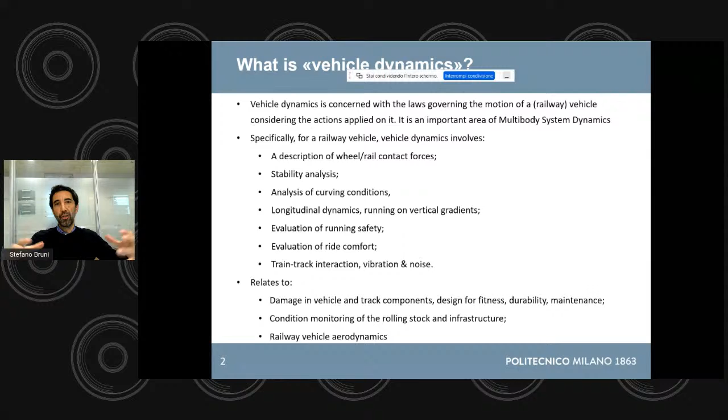This is an overview of my presentation. I will try to address 4 main points. There is an initial part which is a little bit more theoretical and clarifies the fundamentals of wheel rail contact, as it is useful to introduce vehicle dynamics problems. Then we will go into stability and curving behavior for a railway vehicle, which are 2 fundamental problems in the design of a railway vehicle. We will then talk shortly about ride quality, and finally condition monitoring.

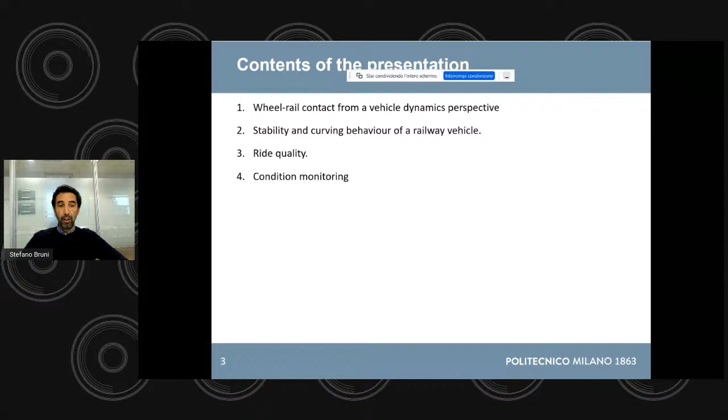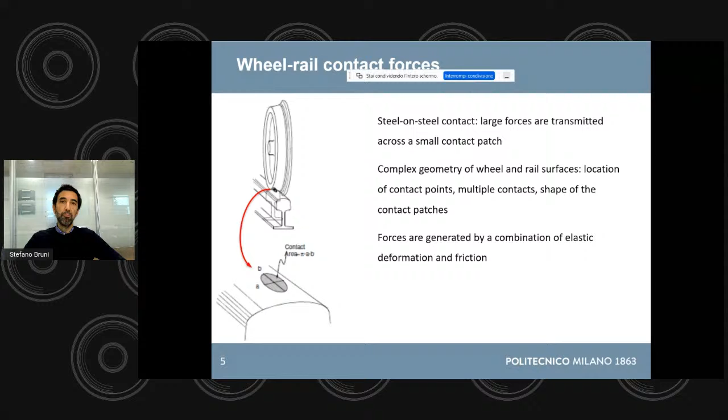So let me start with a summary of wheel rail contact forces. In railway vehicles, we have steel-on-steel contact of the wheel over the rail, with large forces being transmitted over a very small contact patch. On top of that, we have a complex geometry of the wheel and rail surfaces, a nonlinear relationship of the forces to the running condition of the vehicle, and forces being generated by a combination of local elastic deformation close to the contact region in the 2 contacting bodies, and the effect of friction.

So it is a very complex problem, and it requires rather complex solutions. I will not go through all of the solutions and methods and models, because it would be too time-consuming. I will just clarify some fundamental issues. Let's say the problem of defining wheel rail contact forces can be split into 3 steps. The first goes under the name of geometric problem or contact point search. It consists of finding the position of the contact points between the rails and the wheels, given the relative position of the 2 bodies.

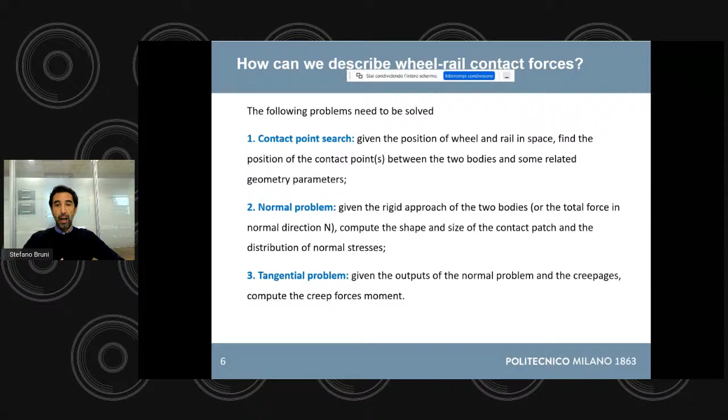And finally, the tangential problem consists in computing the tangential forces, components of the contact force. That means the frictional forces developed between the wheel and the rail, once the normal load is known, and based on the relative motion of the wheel and the rail.

In terms of contact point search, this can be addressed in different ways. I'm not so much interested in describing the details of how this can be solved, but let me just say that in the end, what you get is summarized by the plots you see in this slide.

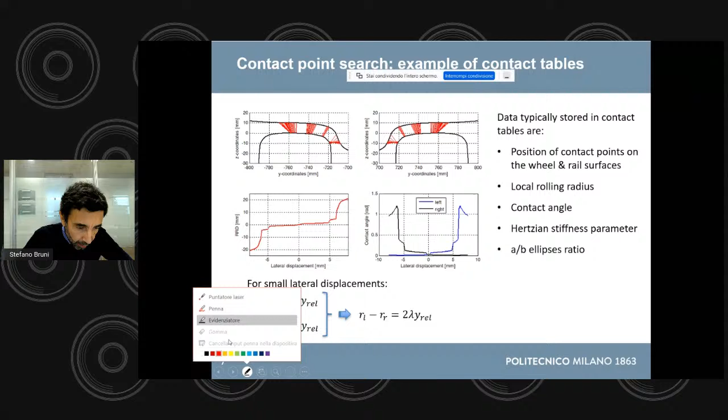So in the upper part here, if you can see my mouse, maybe I can use a pointer to improve visibility. I see it - maybe it was not such a good idea. Or I can put it to red and use this choice, okay?

In this upper part of the plot, you see the transversal profiles of the two wheels and of the rails, and you see the red lines connecting points on the two surfaces, which show where the two profiles will become in contact depending on the relative position of the wheels over the rails.

When the left wheel is completely displaced to the left, the gauge corner of the rail makes contact with the wheel flange in this region, and on the other wheel-rail couple, you have contact on the top of the rail with the tread of the wheel. When you move the wheel from left to right, contact points will move into an opposite position where the flange of the right wheel makes contact with the inner corner of the right rail.

Out of this analysis, you can also find important geometrical parameters, like the so-called rolling radius difference - that's the difference between the local rolling radius for the left and right wheel, caused by the conicity and by the peculiar shape of the wheel profile.

You can also find the value for the contact angles, the angle defining the slope of the tangent to the contact, of the common tangent to the profiles in the contact point.

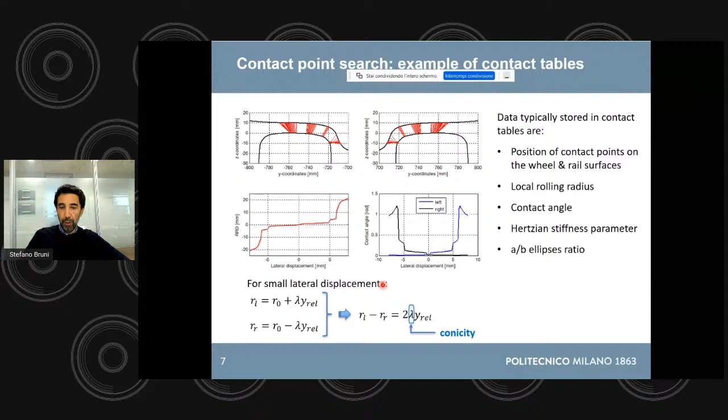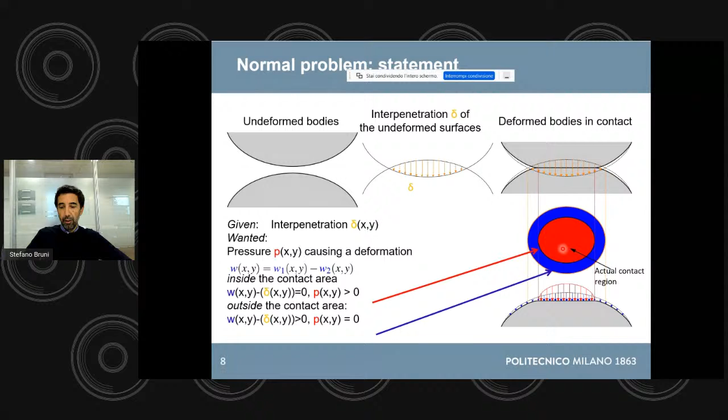Now, there are different ways, again, to solve this problem, the simplest one being the very well-known and popular Hertz theory. In that case, we take one simplifying assumption: we consider a constant curvature for the two contacting bodies, for the wheel and for the rail, in the region where contact takes place.

Out of this and some other simplifying assumptions, like assuming that the wheel and the rail behave elastically like elastic half spaces, we get the classic solution by Hertz, which states that the contact region is an ellipse, defined by the semi-axis A along the rolling direction and B in the direction perpendicular to the rolling direction for the wheel, with an ellipsoidal pressure distribution where the maximum pressure is defined by this expression, which is a function of the normal load N and of the sides of the ellipse, basically the product of the two semi-axes.

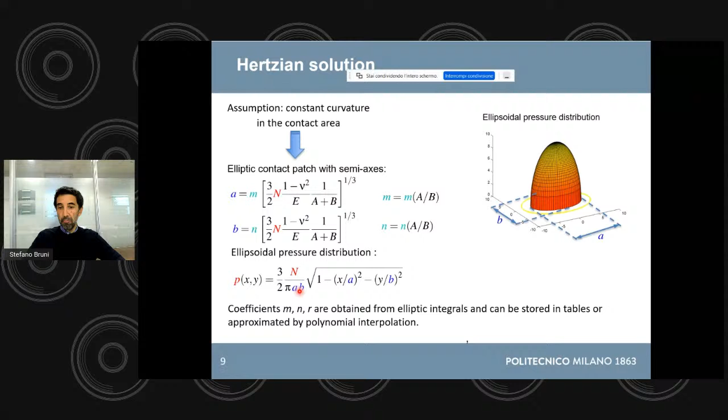Of course, in this case, the models you have to put in place are more complex. They are also more computationally intensive, which means if you are using these models in numerical simulation in the time domain, the simulation is going to be more time consuming because of the time required to solve the complex equations for wheel-rail contact. But it provides a more accurate description of wheel-rail contact, which is important both to define effects like curving and stability, which depend on the size and shape of the contact patch, but also have an effect on possible damage caused by rolling contact fatigue and wear, because this is highly affected by parameters like the maximum pressure in the contact region.

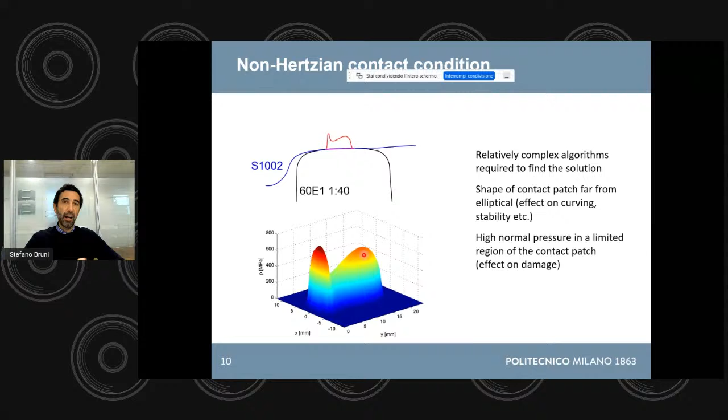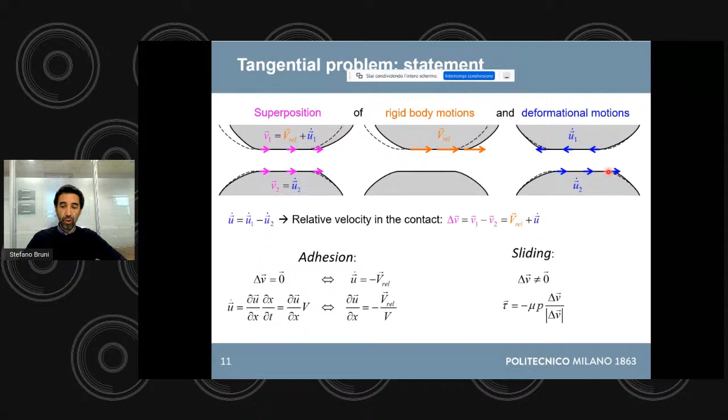Then we define a longitudinal creepage parameter. This is a non-dimensional parameter defined as the ratio of the difference in the rigid velocity of the upper and lower body divided by a reference speed, which in this case is the average of the forward speed for the wheel center and the peripheral velocity of the wheel while rolling with angular speed omega. And we define the longitudinal frictional force Fx divided by the adhesion limit mu times N, where mu is the dry friction coefficient between the two bodies, to be a nonlinear function of creepage.

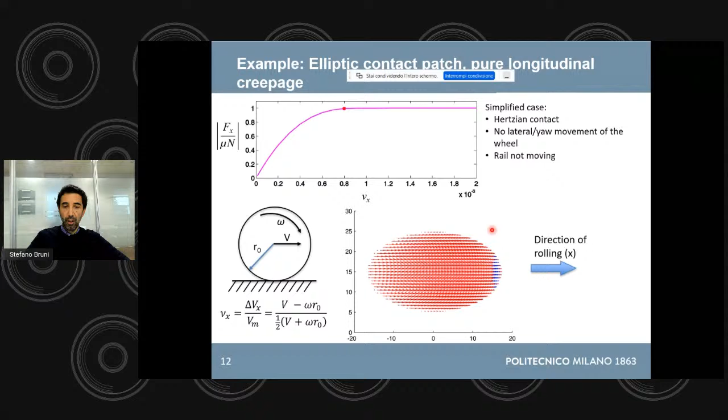You see that the contact patch gets divided into a region in blue color, where we have adhesion between the wheel and the rail, so no slip between the two bodies, and another part of the contact where we actually have slip between the two bodies. When we further increase creepage, the point here moves up, meaning that while increasing creepage, we also increase the total force, and also increase the size of the portion of the contact patch where we get slip between the wheel and the rail. This continues increasing until we reach a saturation condition where the longitudinal force cannot grow anymore because it has reached saturation. In this condition, the contact patch is fully in slip condition, like this.

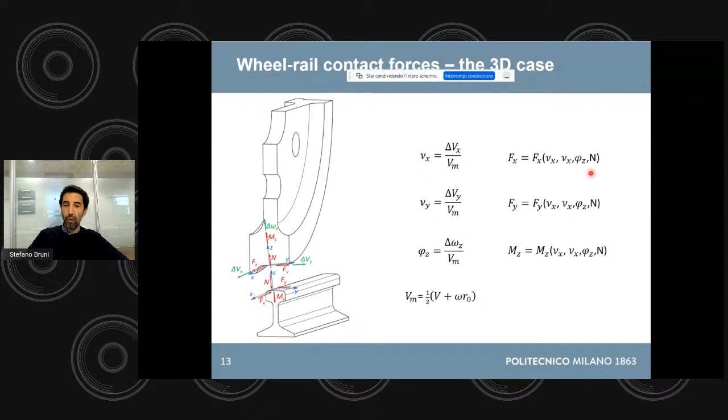And we can define three components of contact force and moments: a longitudinal force component Fx, a lateral component Fy, and a spin moment Mz, which are exchanged between the wheel and the rail, and they become a function of the three creepage components and of the normal force.

This is again very complex to describe, and we need to simplify it in some way. A very popular way of simplifying this is to take the assumption of small creepages, which means we confine our attention to a range of contact conditions where the various components of creepage are all small. Then we can take a linear approximation for the relationship between the creep forces and the creepages.

This results in the well-known Kalker's linear theory, which states a proportionality between the longitudinal creep force Fx and the longitudinal creepage νx through coefficient F11, and a linear relationship between the lateral creep force Fy, the lateral creepage νy, and the spin creepage phi z, through two coefficients F22 and F23.

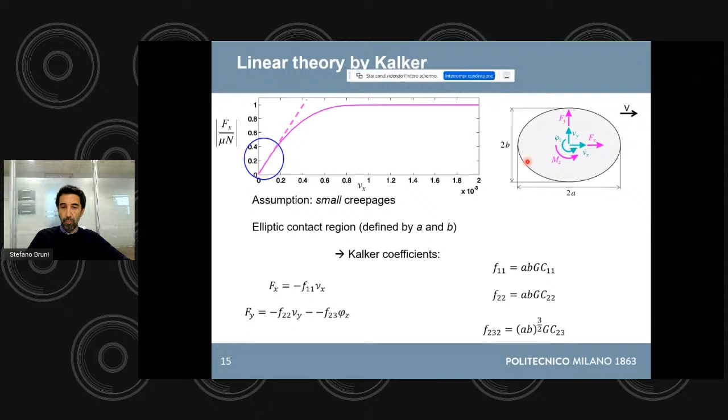This is only valid for an elliptic Hertzian contact patch, but it's very useful because it's a simple representation of the forces. Now let us look at how this translates into an analysis for stability and curving.

First of all, stability. What do I mean by stability? Well, the picture on the right is a photo taken in France, I think in the middle of the 1950s, when a world record was performed on a French track, and the world record was fully successful.

But when people went back onto the track after the record train had passed, they could see that the track was completely misaligned. It was realized that this was caused by a violent movement of the wheelset in the lateral direction, which was later recognized to be accompanied by a rotation. This is a top view of the wheelset - a rotation around the vertical axis, known as the yaw rotation. So a combined lateral and yaw motion of the wheelsets in the train, caused by a particular instability condition, which was then known as hunting.

It took a long time before this phenomenon could be fully clarified, until, I would say, the end of the 1960s. After that time, we took very seriously the need to perform a very accurate stability analysis as part of the design, operation and maintenance of railway vehicles, especially for high speed.

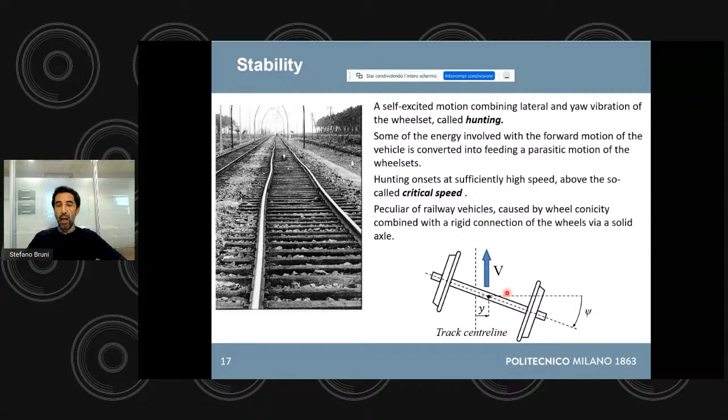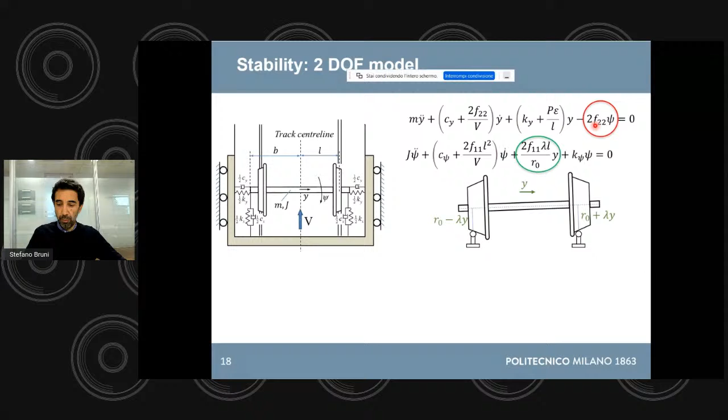If we didn't have these two coupling terms, the motion in lateral and yaw direction would be completely uncoupled. But due to these terms, the motion becomes a complex combination of lateral displacement and yaw rotation.

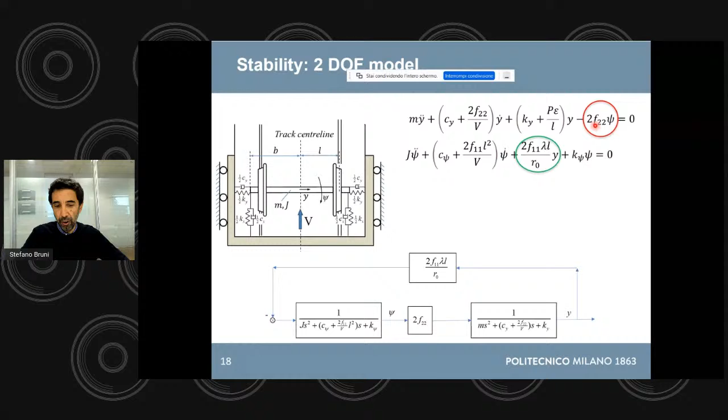If you are familiar with automation and control theory, you may like describing this in terms of a block diagram, where this block describes the lateral dynamics and the yaw rotation of the wheel set. We get the yaw angle psi in output. This is multiplied by coefficient 2F22, and provides the forcing effect to the lateral vibration of the wheel set, which provides as output the lateral movement of the wheel set, fed back through a proportionality gain coefficient, which becomes the forcing effect for the yaw rotation of the wheel set.

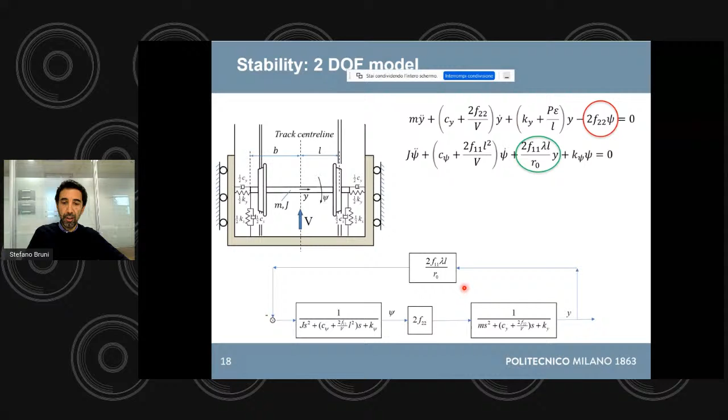This scheme shows that the phenomenon is basically a natural feedback loop developed for the wheel set. If you have familiarity with automation and control engineering, you know that when you have a feedback loop with too high gains, and especially a non-favorable phase, the feedback loop may become unstable. This is actually what is happening in our case.

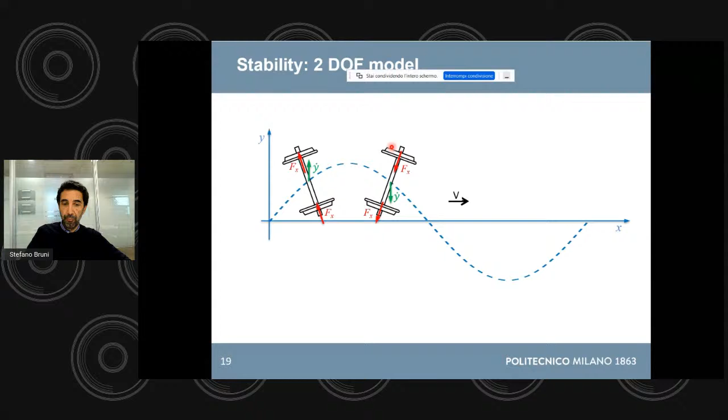Looking at it a different way: when the wheel set oscillates harmonically, as it moves to the left (up in this top view), this combines with a yaw rotation that produces lateral forces also pulling the wheel set to the left, so the instantaneous power of the contact forces multiplied by the velocity is positive. When the wheel set goes back to the center and moves to the right, the yaw rotation changes and becomes opposite, so again you have the same direction for the lateral creep forces caused by the yaw rotation and the movement of the wheelset.

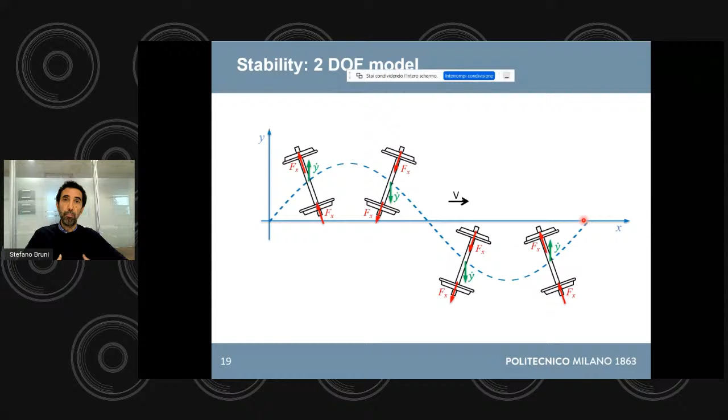This continues through the entire cycle so that you have continuously positive power feeding energy into the vibration of the wheelset. So instead of becoming a damped oscillation, it becomes an expansive oscillation, confined only when the flanges of the two wheels get in touch with the inner gauge of the rails. Because this contact can be very strong, hard, and violent, you may even get a derailment of the wheelset, or a permanent lateral displacement of the track, of the rails.

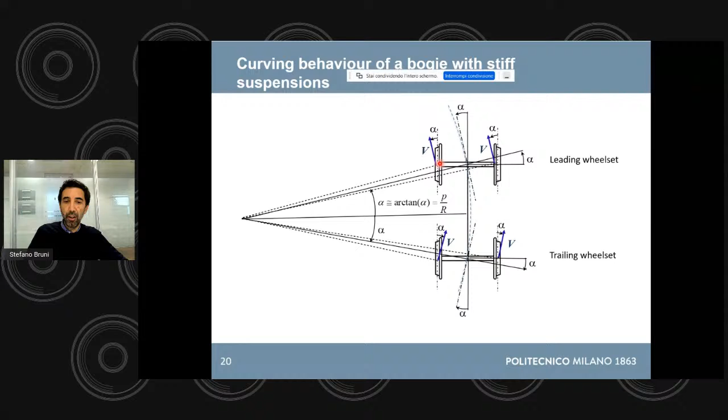So if we consider a very simple situation where we have the bogie with infinitely stiff suspensions, and also assume relatively small creepages, we may use the theory by Kalker we have seen before. We assume there is no flange contact between the wheels and the rails, which is a highly simplifying assumption, but otherwise we would get into a too complex case that could only be solved by numerical means.

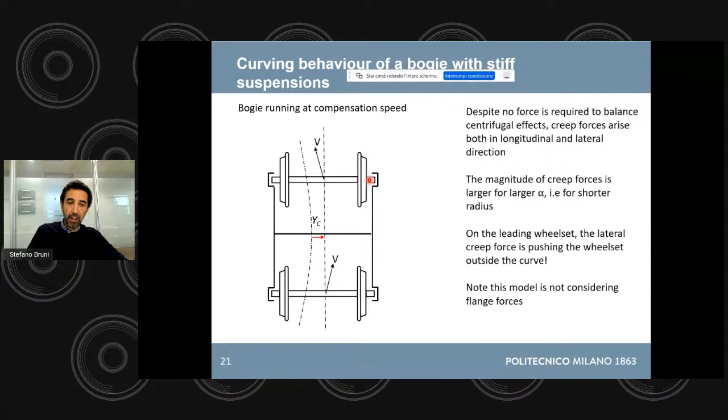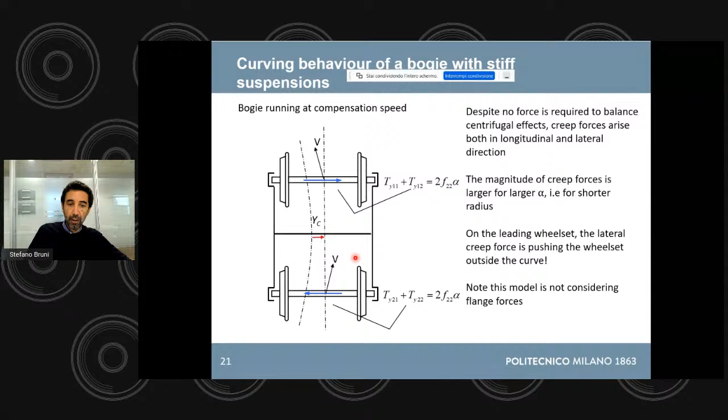If we stick to these simplifying assumptions, then we find that even if we consider the bogie running at compensation speed, meaning centrifugal effects due to the curvature of the track are fully compensated by the cant applied in the track, we still have transversal creep forces arising on the leading axle and on the trailing axle. Because these opposite forces generate a moment which tries to yaw the bogie in a clockwise direction, this must be reacted by longitudinal creep forces arising at the four wheels.

I would like to stress that all of these forces, represented by the blue arrows in this plot, are not needed for the bogie to achieve a balance of centrifugal forces, because that is already guaranteed by the cant of the curve, by the compensation. So these are unnecessary forces that still arise because of the specific way the bogie runs through the curve.

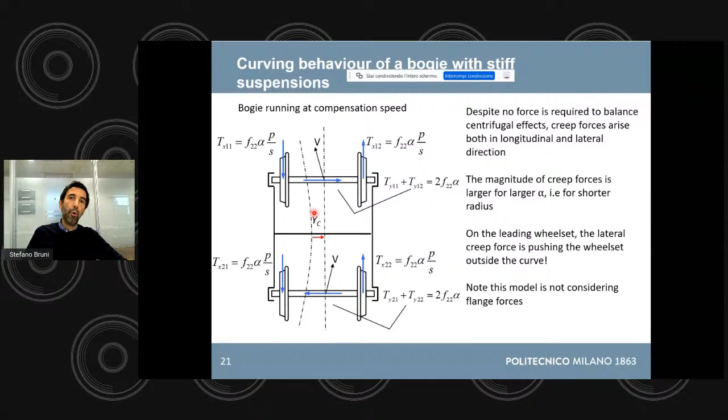Even when we make the picture more complex by introducing a saturation of wheel-rail contact forces, by introducing flange contact between some wheels and the corresponding rails, it still remains that there is an excess of frictional force being generated while the vehicle negotiates a curve, beyond the minimum value of frictional or creep forces that would be needed for that. Of course, all of these frictional forces cause damage and wear, both in the rails and in the wheels, which is highly unwanted.

So the question ultimately is how to design the vehicle to have good curving performance, which means especially avoiding excessive wear and damage on the rolling surfaces as a consequence of curving, ensuring the forces are not large enough to be harmful to the safe running of the vehicle, and at the same time guaranteeing good stability for the vehicle.

Unfortunately, these two goals turn out to be in conflict with each other. If you want a design for good curving, you want flexible suspensions that, contrary to what I was showing in the previous two slides, will allow the wheelset to align radially, compensating for the effect I showed before, reducing wear and damage in the wheelset, reducing creep forces, and improving safety. But soft suspensions can be shown to be harmful to stability.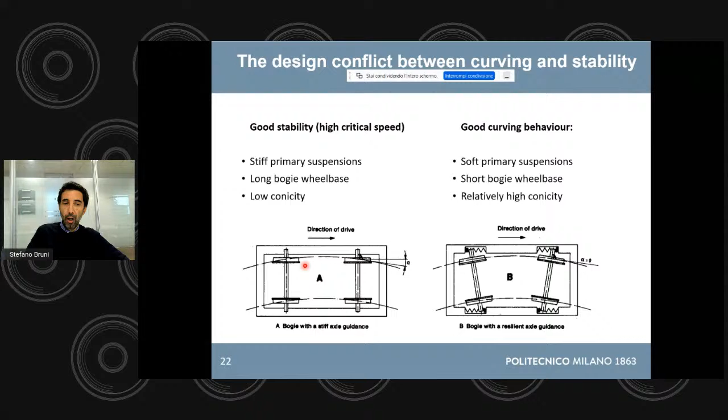To get good curving behavior, we'll also want a relatively high conicity so that the conicity of the wheels can compensate for the different length of the outer rail compared to the inner rail. But this again is harmful to stability, and so on. So how can we solve this design conflict?

Apart from passive optimization of the vehicle, which is the classical way followed since the start of modern railway vehicle design until a few years ago, it is now more and more frequent to use active suspensions. So the first example I would like to show is an active primary suspension, with a published example from Bombardier, which uses longitudinal actuators.

You see the red arm here, which is moving back and forth the axle box based on an actuator, which is basically formed by this green lever. This is capable of creating a desired yaw angle for the wheel set, or applying a yaw torque on the wheel set, which will control the movement of the wheel set, inhibiting instability.

If we go back to the feedback control loop that we considered before, shown here by the part of the picture with a blue shade, we can add another feedback loop created by active control, which can be designed to cancel the effect of this instabilizing effect. Of course, having an actuation system at the primary suspension level can be challenging in terms of making sure that this can be designed to be safe enough, reliable enough, and so on.

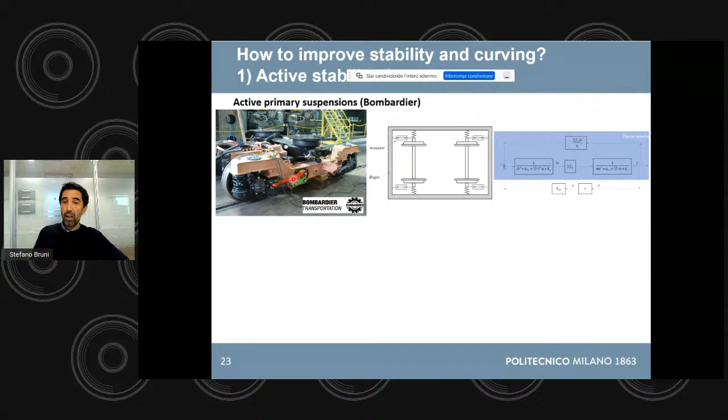In other cases, you may want to apply active control between the car body and the bogie, at a secondary level. This is an example of an electromechanical actuator used to apply controlled torque to the bogie between the car body and the bogie. This goes back to research we were performing with Alstom some years ago.

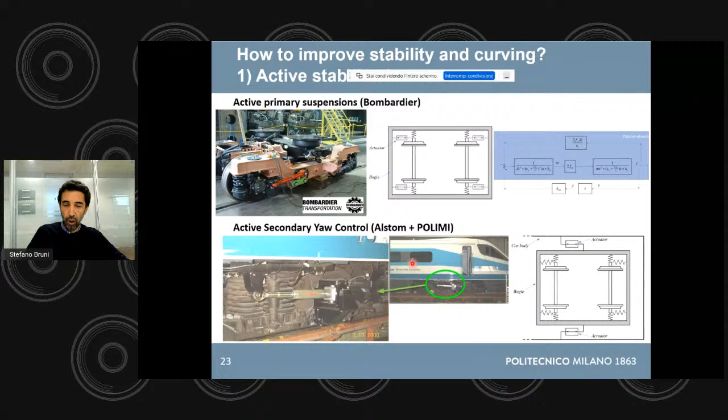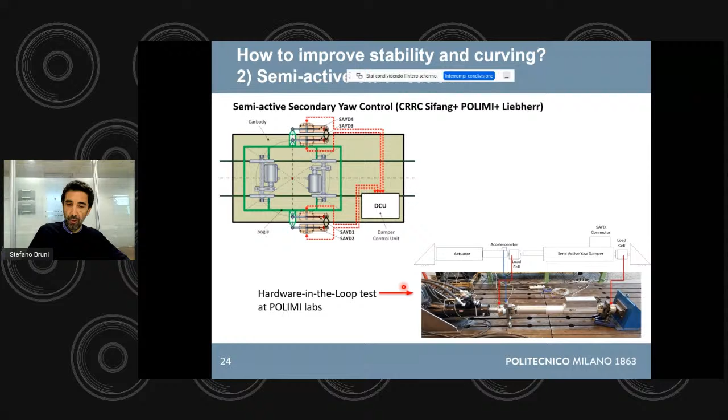More recently, people have started to think about semi-active solutions, and I'd like to show you a concept for a semi-active yaw damper we have been developing quite recently with CRRC, the Chinese railway vehicle manufacturer. So far this concept has been tested in our labs according to a hardware-in-the-loop test, but I don't have time to go into details of this. If you have questions, I would be happy to answer them.

And finally, you can use active steering, which is normally more frequently used for low speed vehicles which have to travel very narrow curves, so for urban environments like trams and metro vehicles.

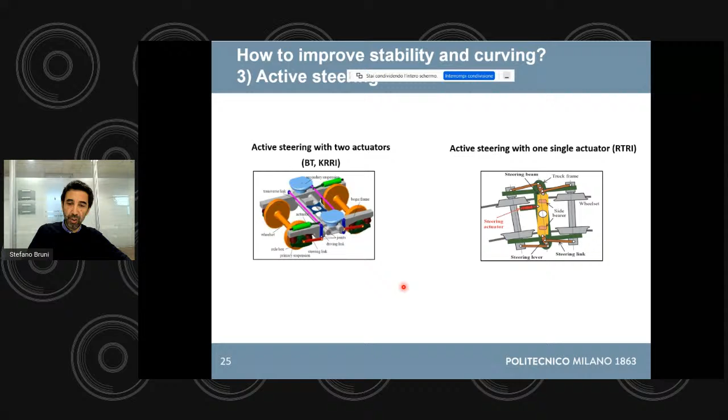Let me now go into ride comfort, ride quality, which has to do with passenger comfort. The rationale behind this analysis is that when the passenger is sitting in the car body of a vehicle, they are subjected to vibrations, and these vibrations will cause a discomfort sensation, which is related not just to the intensity of the vibration, but also to the frequency at which it happens.

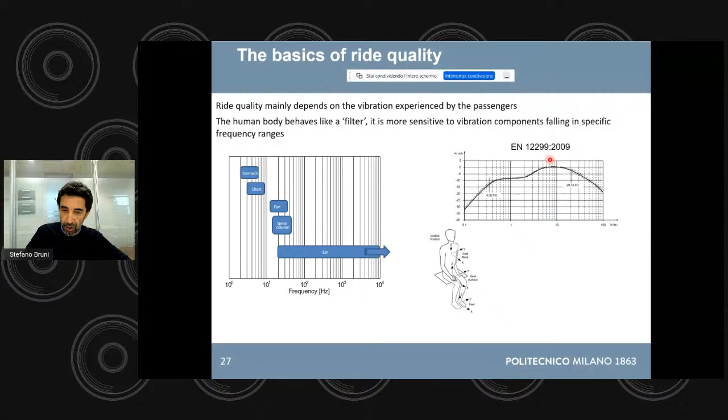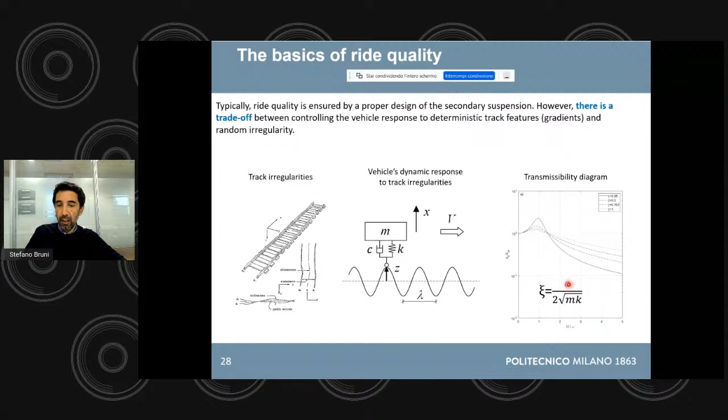But unfortunately, then you get higher vibration when you get into the resonance condition, and when you get into slow, low frequency effects, like the effect of gradients in the track. So you cannot reduce damping too much, and again you are faced with a conflict between using too low a damping or too high a damping.

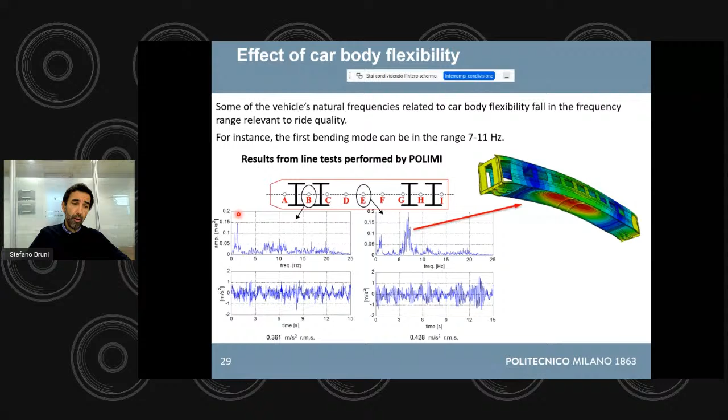So how to control at the same time rigid body motion and flexibility effects? You have 3 options. The classical option is to use passive suspension.

In this simple scheme, you have the primary suspension here. A label is missing, I apologize for this. Secondary suspension between the bogie and the car body.

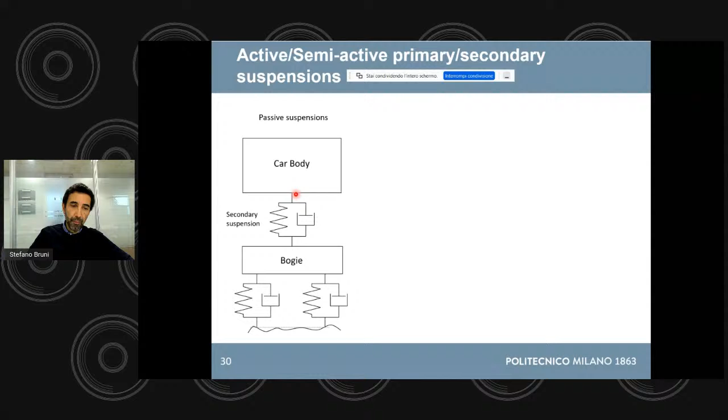You may opt for active or semi-active suspensions at the secondary suspension level, replacing the passive damper by an actuator or a semi-active damper here, or you can use active or semi-active primary suspensions.

So you're replacing primary passive dampers by either full active actuators or adjustable dampers.

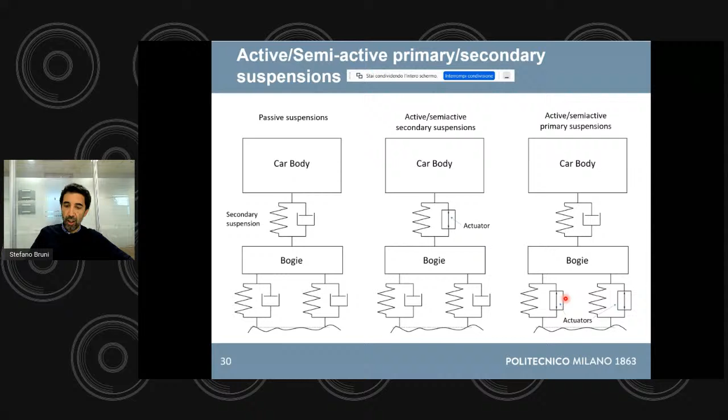This is an example. I don't have time to go into the fine details of the different approaches, but I will be happy to answer questions on this. I want to show you an example from a project we are following in cooperation with CRRC, where we have tested both semi-active primary and semi-active secondary suspensions.

In the case of semi-active primary, you have a very limited benefit in the frequency range between 1 and 3 Hertz, which is related to the rigid motion, but you still have a good effect in the frequency range around 8 Hertz, which is related to the first bending mode of the car body.

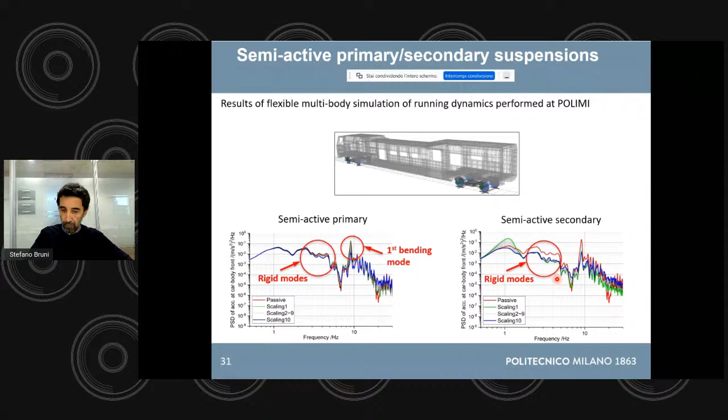If you resort to semi-active secondary, then you can have a good improvement here. I missed mentioning that the red line is for the passive vehicle, and the blue and green lines are for different scalings of the semi-active suspension. So you can improve both the response of the car body in the frequency range related to rigid body modes and to the first bending mode.

I'm afraid I will need to skip my slides about active pneumatic control.

So I have maybe 5 minutes to talk about condition monitoring. While condition monitoring maybe is not directly related to, or is not really one part of vehicle dynamics, it has a very strict connection. And I can say there is a very strong motivation for considering condition monitoring of railway vehicles nowadays.

If you talk to an operator in Europe, and even to an infrastructure manager in Europe, they will always tell you, we want to reduce maintenance costs. And the way we would like to do that is to improve our condition monitoring so that we can better know the condition of the rolling stock in the case of the operator, and of the track in the case of the infrastructure manager, and then optimize our maintenance strategies based on this knowledge.

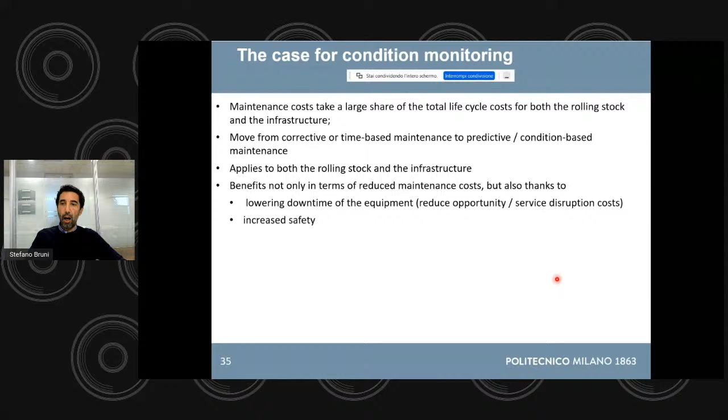Of course it's a very ambitious and very complex task, but something can be done and rapid progress is being made. I would like to show you just some examples.

One example we are following in cooperation with Lucchini. Lucchini is a very important company in Italy manufacturing wheel sets, especially but not limited to high-speed vehicles. For instance, to my knowledge, they are supplying all of the wheel sets for Chinese high speed, which is the largest market for high speed in the world.

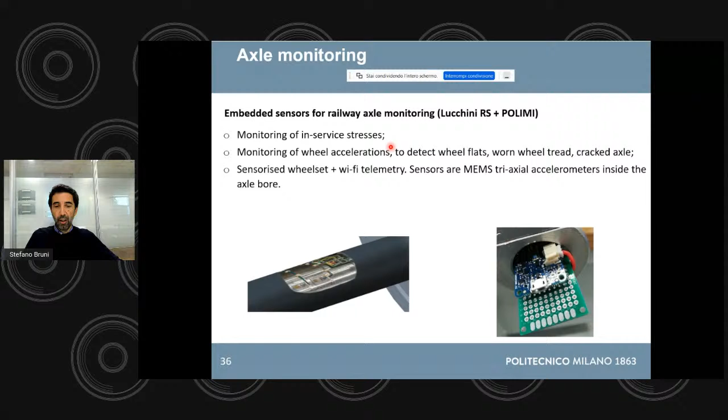They are now considering, and we are supporting them in this, having instrumented wheel sets which allow monitoring of in-service stresses together with monitoring of in-service vibration. This can be used for different purposes: to know about the condition of wheels, to recognize the effect of wheel flats, to know about stresses and then improve the design, and also adapt the periodicity of non-destructive testing of axles to find the presence of fatigue cracks in axles.

We are also considering the chance to use these instrumented wheel sets to provide a continuous in-service health monitoring of railway axles.

In Italy, we were really shocked some years ago, in 2009, by the tragic accident in Viareggio. So we are spending an effort to make sure that this will never happen again.

One way is to have continuous in-service health monitoring of railway axles. If a crack is propagating in the axle, you can recognize its presence from the so-called breathing mechanism, which means while the axle is rotating, the crack will open and close due to the opposite effect of bending forces acting on the axle. This turns into distinctive features of the bending vibration of the axle that can be measured and recognized.

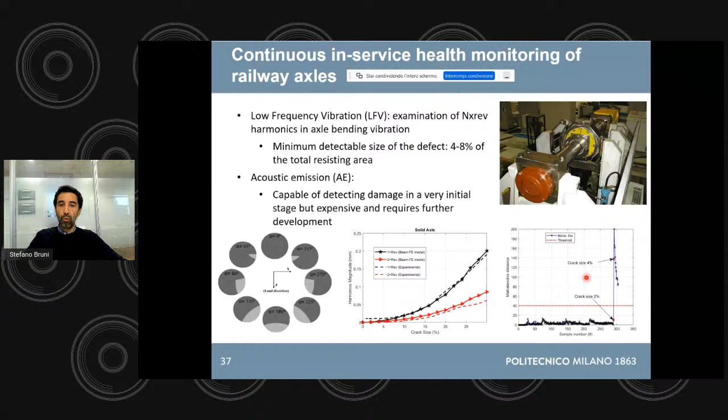According to our laboratory tests, for the time being we were able to detect a crack size which was 4% of the total resisting area in the axle, which is still in the starting phase. So you can rule out this axle before it gets into a dangerous situation where it could fail and cause an accident like the one I mentioned.

Another important topic involves another type of instrumented wheelset, used to measure wheel-rail contact forces, which can serve several purposes including the homologation of new vehicles. This is a very expensive measuring setup, so it's not for equipping a very large number of wheelsets in service, but it's still used for experimental vehicles.

This is the system we developed for the ETR 1000 high-speed train, the new generation high-speed train in Italy. It was tested on the Italian high-speed line up to speeds slightly above 390 kilometers per hour. Here you see one example of the measurements with a very stable and well-performing signal from our system.

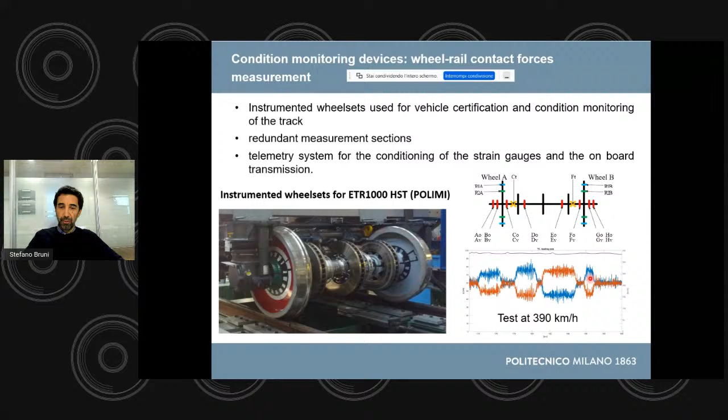Another important topic, as I'm approaching the end of my presentation, is monitoring and prognostics of bearings and gearboxes in the traction unit of a railway vehicle, a locomotive, or a distributed power train set. In this area, we did a lot of research.

I would like to give you an example with a test rig we established together with Bombardier, which includes a traction motor, a gearbox, bearings, and a brake motor used to feed back, operate, and brake the drive unit, feeding power back into the traction motor.

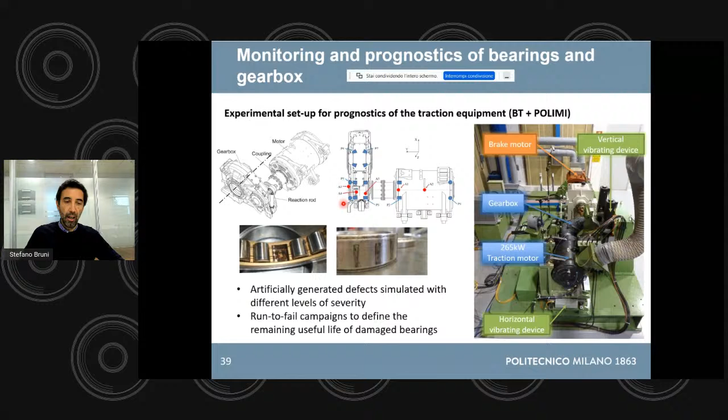We applied initial defects which were generated artificially, and we could see how these defects were growing with time, and also which were the best acceleration and temperature signals suited to spot these defects in their early stage, avoiding catastrophic failures in the drive unit.

I will conclude with this example. This is totally different—it's a portable condition monitoring unit. This is a one-euro coin to give you an idea of the size of this unit. I'm aware that euros are not in use in Brazil, but this coin has a diameter of 23 millimeters.

The unit is nice because it includes an energy harvester system. I apologize for some words in Italian here, but I hope you can still get the point. You have a small battery, a unit for managing power, a microcontroller, a 3-axis accelerometer, a temperature sensor, and also a low consumption MiWi unit able to transfer the measured data to a receiving unit on board the vehicle.

So this is very nice for a sort of revamping of existing units, providing them with condition monitoring capability.

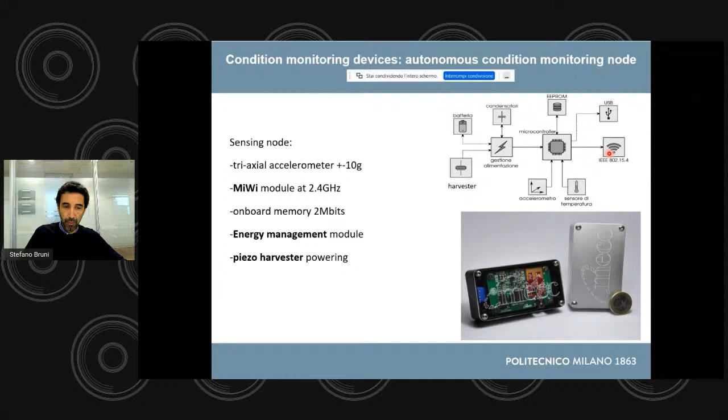I think this is my last slide, so I thank you for listening. I hope I was keeping the time more or less to 15 minutes, and of course I will be very pleased to answer your questions.

All right, thank you, Professor Bruni. It was a very good presentation.

Almost a complete railway dynamics course, followed by some of the recent developments. And we have some questions here.

Just let me refresh the form here so I can check if anybody has asked something more. Okay, so here we go. I will try to organize the questions more or less in chronological order. So let's move on—first one comes from Pedro.

Pedro is a student at UNICAMP, and he's asking: how can you use automation, and specifically computer vision, to help improve safety and performance in vehicle dynamics? Okay, thank you, Pedro. This is a very interesting question.

The first point that comes to mind is vision can be used to improve monitoring of infrastructure. Already today, track geometry monitoring, which is important not only for ride quality but also for safe running of vehicles, is done by optical systems often combined with accelerometric systems. This exists already, but it may be improved. In bad weather conditions, like snow, cameras may not work at the top of their performance, and then you may have issues with this.

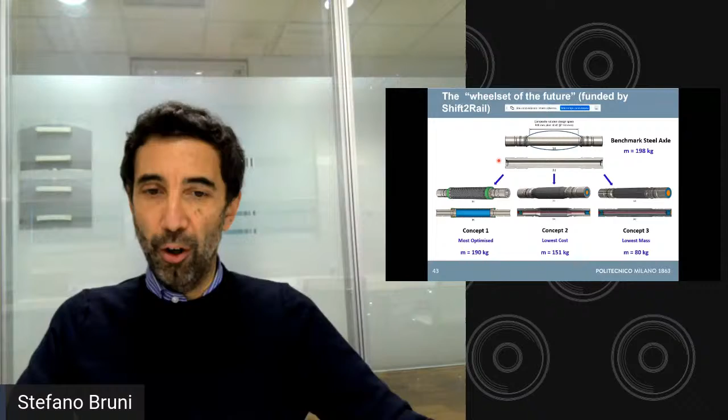I'd also like to take the opportunity to quickly show one slide about a project. This is very futuristic, visionary, not for tomorrow, maybe 10 years from now. The idea is replacing the steel axle with a carbon axle, an axle made at least partly of carbon fiber material. You see three concepts developed in a project called Wheelset of the Future, funded by a European research program for railway engineering called Shift2Rail. Comparing the weight of the benchmark steel axle, it's nearly 200 kilograms, but with carbon fiber material we were able to lower it to approximately 80 kilograms, more or less 40% of the original weight.

Reducing the weight of the axle of the wheelset is particularly important because this is the so-called unsprung mass, the mass that comes directly in contact with the rails. So it is directly responsible for vibrations, dynamic loads applied on the track, noise, vibration, damage on the rails, and so on. So it is more important to lose weight on the wheelset than on the bogie frame or the car body. Of course, the savings you can make on the wheelset are more limited than on the car body, but they are still very, very important.

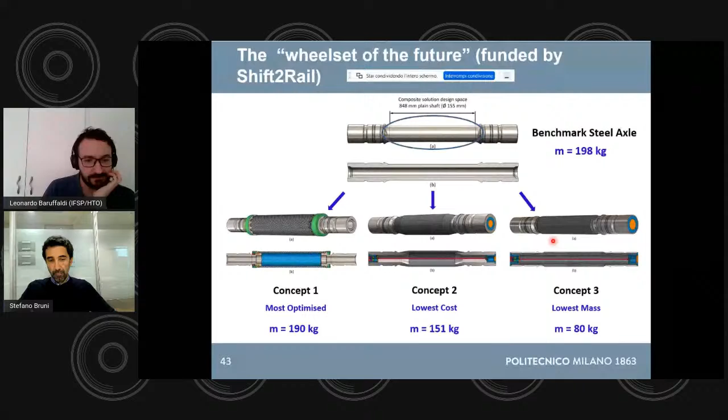Well, that's a really interesting development. In automotive engineering, it's so usual to talk about reducing the unsprung mass, and in rail engineering we haven't been worried about it until recently. That's mainly because safety prevails over every other point of analysis, so you never want to compromise safety even if it brings a big advantage in terms of reducing unsprung masses. But things are slowly changing. At least meaning that I do not mean we can relax our requirements on safety, but rather things are changing because we are more and more able to prove that we can use new innovative light materials while guaranteeing the same level of safety as traditional steel materials.

Well, I think we will move on to our last question here, unfortunately our time frame is going away. It's an interesting question, it comes from Arturo Cancellieri, a student at UNICAMP as well, and he has two related questions, so I will ask them together. The first is, how do you see machine learning techniques being used for condition monitoring? And the second is, do you know any examples of unsupervised learning being applied to help out maintenance decisions?